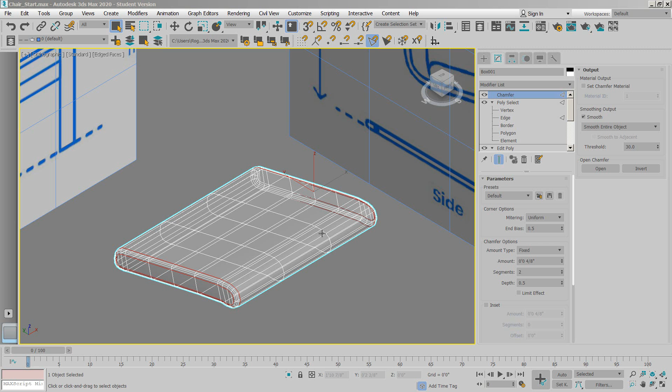So let's start with the bent wood frame of the chair. We'll switch back to the left view. In this case, we're going to use a different technique. Essentially, what we're going to do is draw a spline which follows an element of the bent wood frame, then offset it and extrude it.

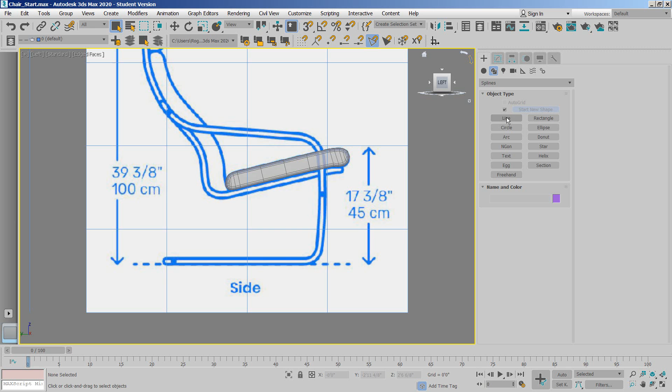So we'll start here by going to the Create panel and then to Shapes, and we use a line tool to draw the beginning of a spline. I'm going to start down here, and click my first point right along the ground level of the chair.

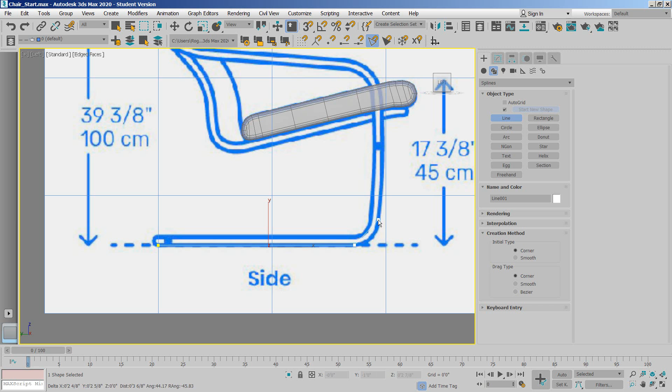As I draw this, you'll see I'm not trying to follow my curves exactly, just trying to pick up the important points where the curve changes direction. Then I'll finish this piece right up here, because the rest of the frame picks up with another piece of wood.

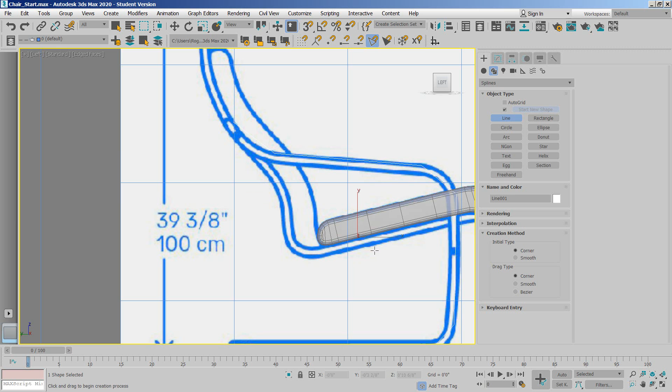Once that's done, go to the Modify tab, go into the line and choose Vertex. Now select all the vertices, make a nice big selection, right click and go to Bezier Corner.

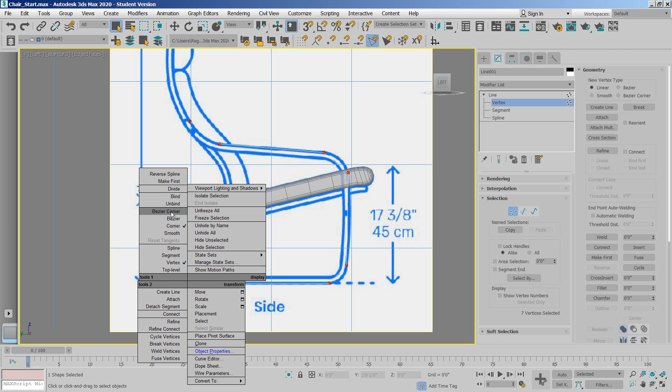This is a type of vertex which allows us to control the curvature of the line or spline at each vertex using a Bezier handle. You can see these Bezier handles appear here, between our vertices.

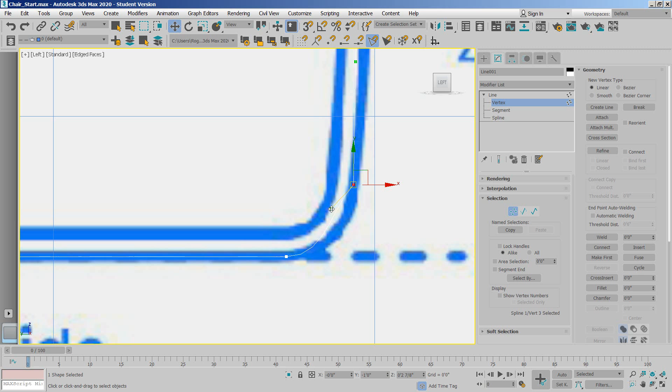So what we need to do is make sure we're in Select and Move. We can choose a vertex, select the Bezier handle, and start to drag it down. Often these Bezier handles will just be there to control your curvature, and the curvature you want is actually close to being a tangent.

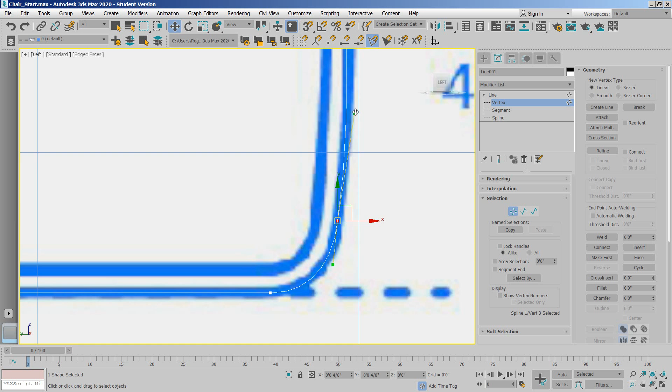Just continue with this. Note that you can move side to side, or move to shorten, depending on how your curve appears. I'm going to do this for the entire spline, and you see that works reasonably well, though sometimes you may need to reposition your vertex because you didn't quite get it right the first time.

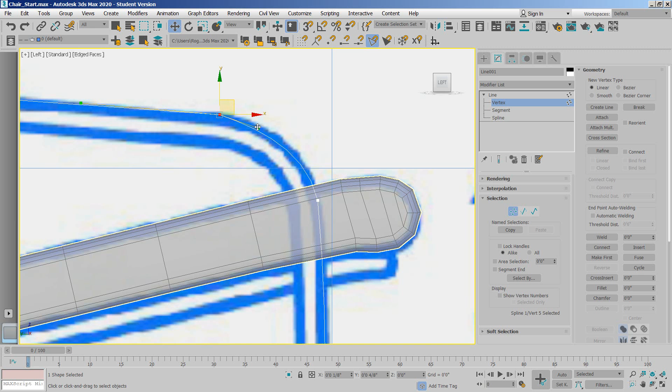That one, we'll leave that one okay. And this one will move here, that, and this one here.

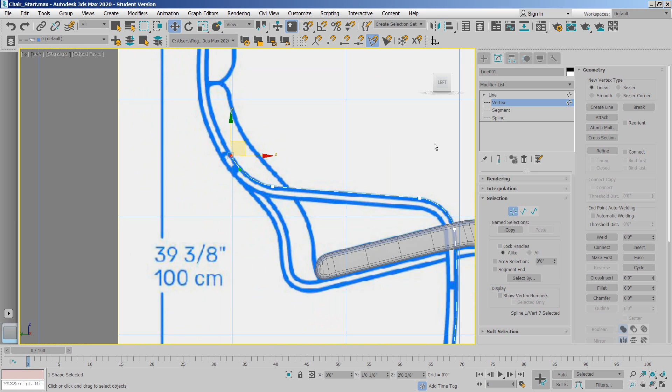Now once we're ready to outline, we'll switch into spline mode and select the entire spline because we want to outline the whole thing. We'll go into the panel, and we'll see there's an Outline tool plus a measurement next to it, which is much easier to use.

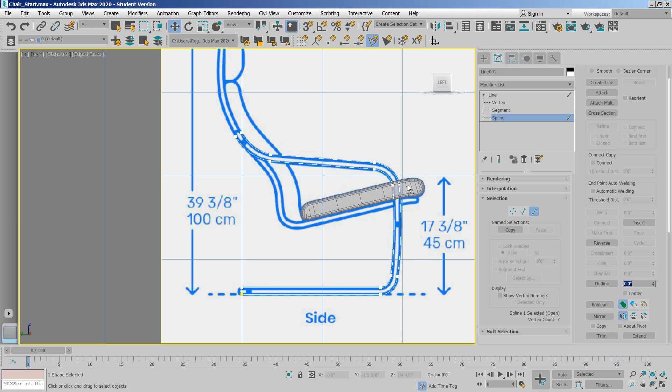So I'll type in a distance of 1, and you see it has outlined the entire spline. I'm going to move in here because I'd like to get this rounded edge.

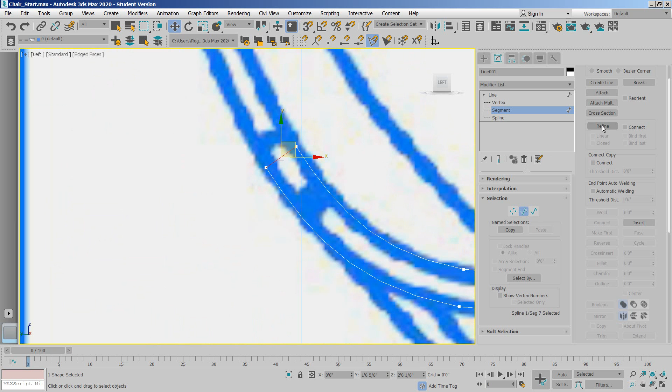The way I'm going to do that is go to segment mode, select that segment, and first I'll refine it, which means adding another vertex. I'll switch into vertex mode, select that vertex and move it. That gives me a not too bad representation.

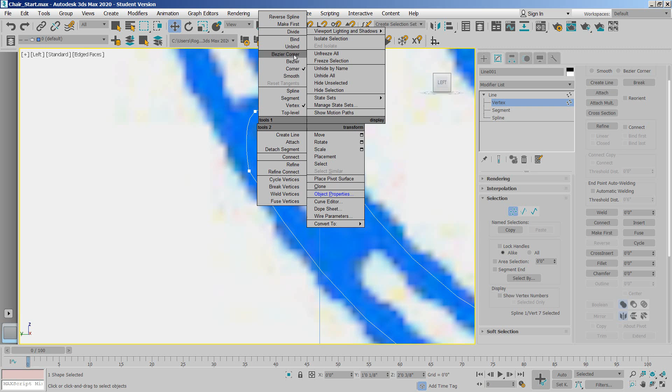Now notice this particular vertex here has only one Bezier handle, because it was on the edge. So what I'll do is first turn this into a corner, which has no handles, and then switch it back to Bezier Corner. Now you see I have both, and I can manipulate both.

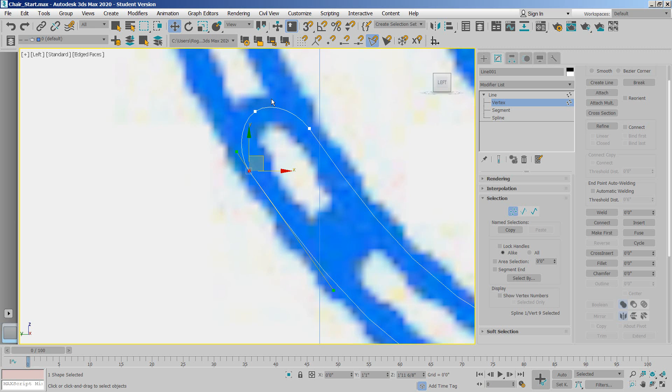I'll do the same on the other side: corner, Bezier Corner, and then do the manipulation here. Maybe that's a little too far away, so I'll move it, and just repeat this on the lower section.

So we go to segment, select, go to refine, click on the segment, go to vertex, and choose the vertex we just created and move it.

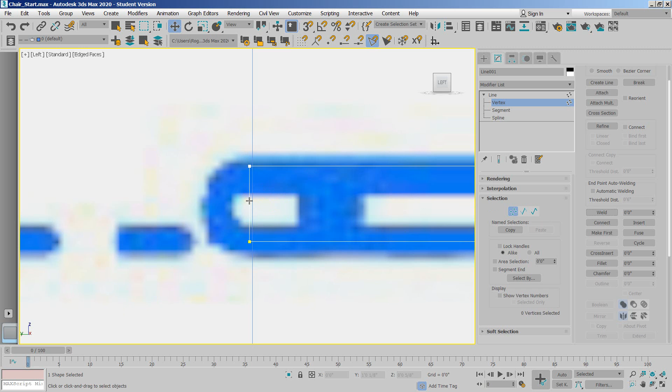Oops, seems to be two vertices there. Let's fix that because that's no good. Choose the two vertices and click weld, go back and choose it again, and now there should only be one there.

Same process for these vertices—actually, I could have done them both at the same time. And go back to Bezier Corner.

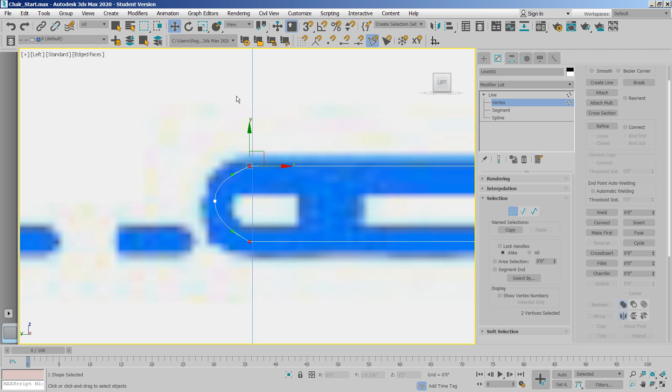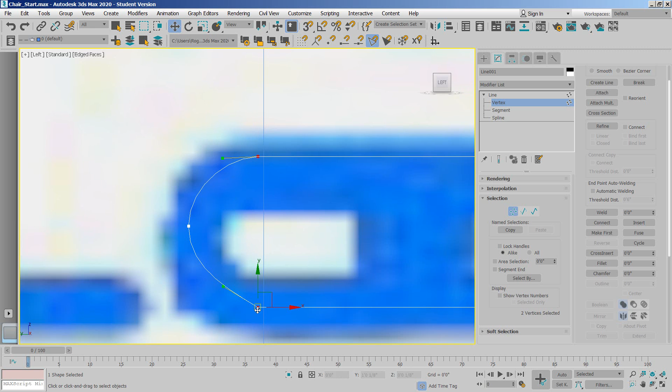Now sometimes you'll see I can't seem to move up and down. Go back to the square and select it so the entire square is selected—in other words, the X and Y is selected. And here I should be okay.

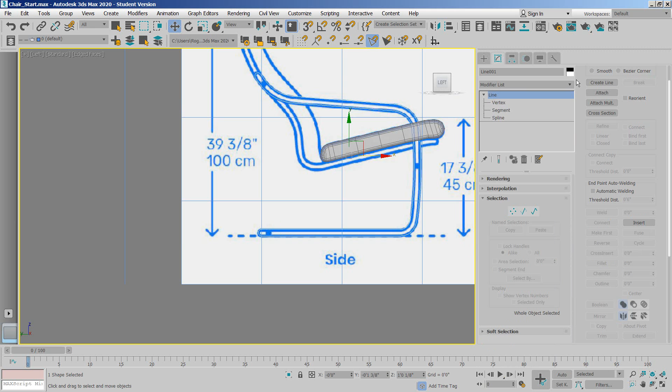Good. So now all we need to do is finish off by extruding this element. We'll go to extrude—actually, we should get out of the sub-object vertex mode first. Go to extrude.

Go to the front view to see what that looks like. There's no amount to my extrude yet, that's why I don't see anything. So let's try 2 inches.

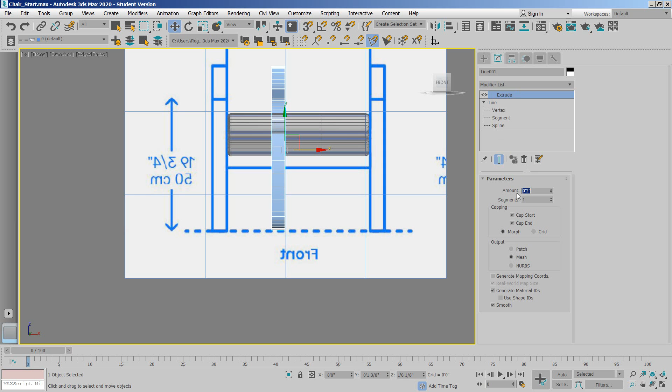It's not quite in the right place, so we'll have to move it a little bit. I'll try to move it close to the cushion, yet leave a little room, and then adjust the amount so it's more in line with the sketch.

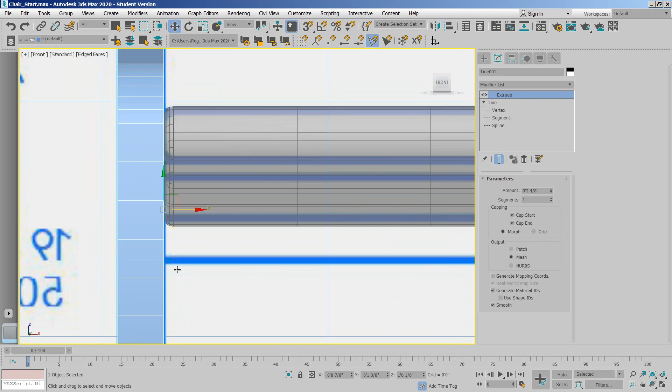Once I've finished the extrusion, I'll hold the Control key down. I'm in Select and Move, and I'll move this over to the other side. You see it's making a duplicate, and what I'll do is select Instance, which allows a connection between these two elements.

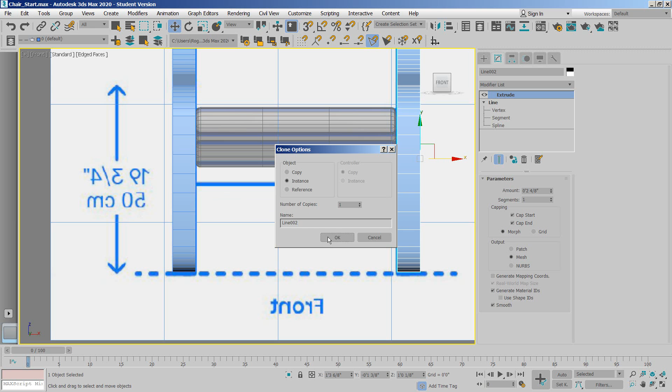So there you have it. Those are the 2 techniques I wanted to show you to create this model. So what I'd like you to do for the rest of the tutorial is to complete the model using the techniques I've shown you.

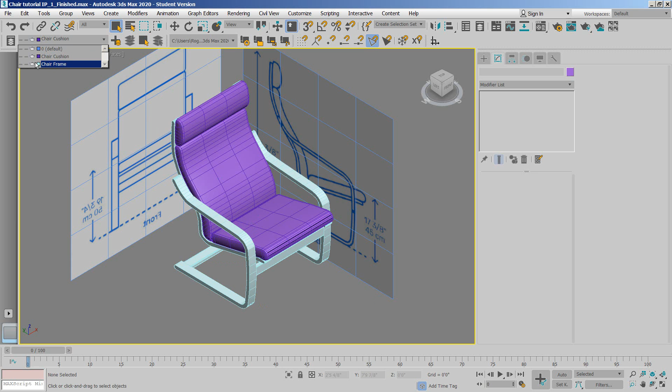One of the important things to do is separate the 2 parts of your model onto different layers. So I've made a chair cushion and a chair frame. Showing you the chair cushion by itself, you can see the seat we worked on together, and basically the back and the pillow on top. The frame is also another element you should work on.

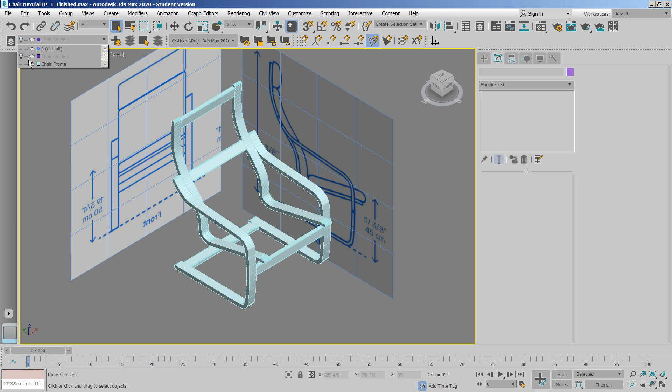If I just display the frame, you can see the element we worked on together is here, and there's another element which has been added on both sides of the frame, and also a brace at strategic points along the frame of the chair. So go ahead and finish that off. That's our tutorial for today.